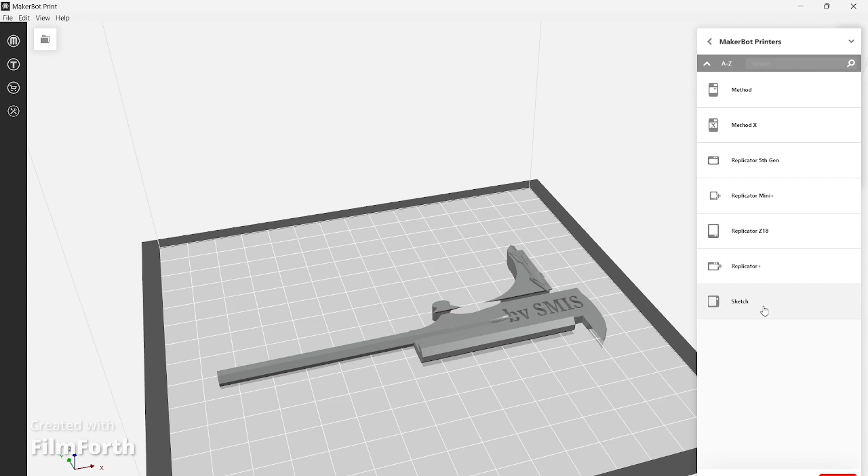The only thing that does connect was the MakerBot Mini and the MakerBot. There were two of them - MakerBot Replicator Mini Plus, and then the Replicator Plus itself. These two did connect. I'm gonna try this next time, hopefully. But the only thing that didn't connect was the sketch.

That's the reason why I tried connecting with the IP address and then add a printer itself. It wouldn't allow me to do that. I'm not sure what's going on with that. You guys need to check that out to see why it's not letting me connect the printer from here to the other side.

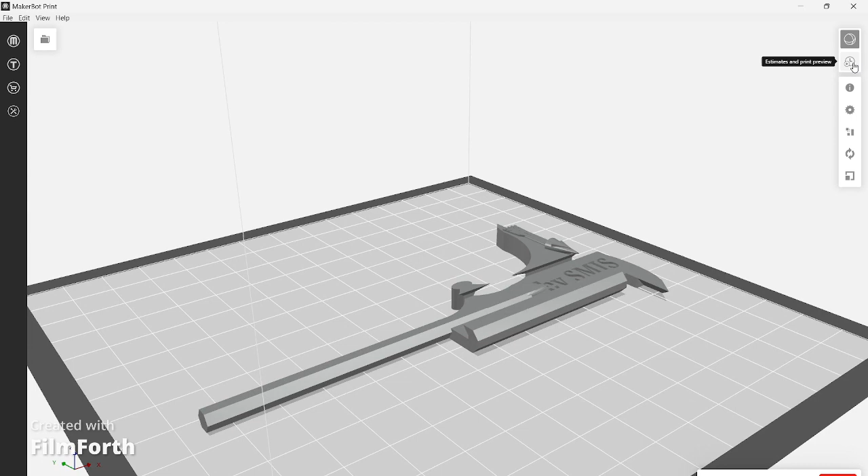So now, this one, I do like this right here, this software. This slicer is supposed to run itself. For example, this right here is the cloud, that's being tested right now.

I like it, I just hate it. That's the reason why I don't. Because look at this, look at this.

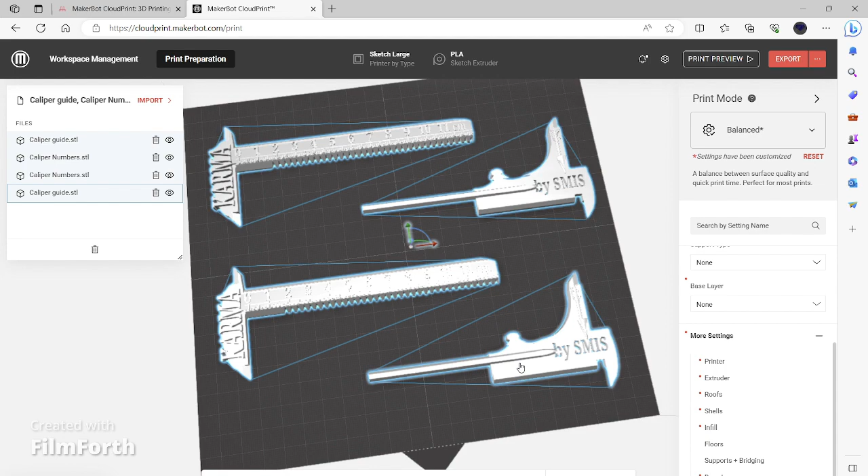These ones are the tool path. I really hate that because I thought I could actually rearrange this guy, move him inside, so I can have this one print in a closer environment. Instead, it gives me this ridiculous detection of interference. Why does it have an interference detection?

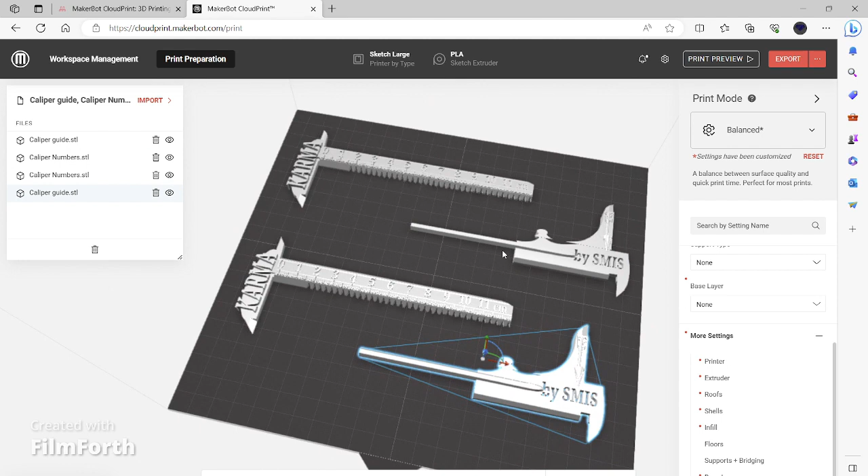Because the nozzle doesn't actually touch these guys right here. I don't understand that. So I have to move it out here where you just waste a lot of room and space, because I can actually bring this guy in here and now add another third one on there.

Because that way it'll be easier for me to print more items with it. So it'll become like this right here. Add more, let's see here. Bring it down so I can add two more on top, so I can 3D print three more. I have another printer that's an off-brand MakerBot - it printed three of them, and it did very well.

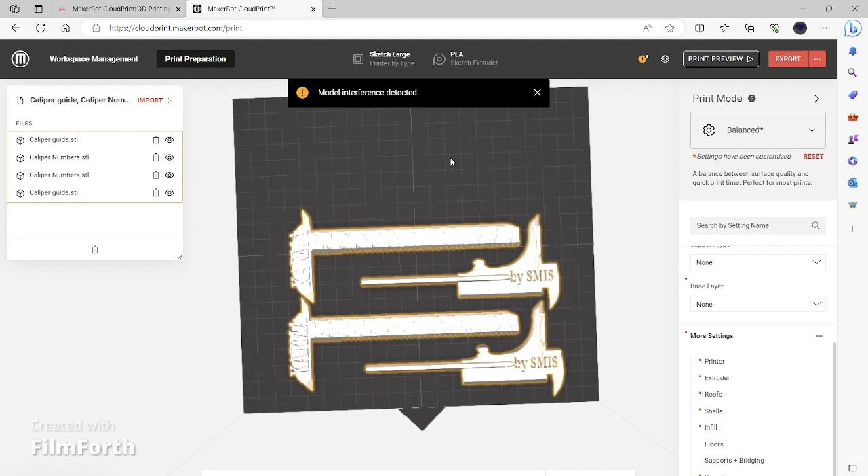I don't get why this has to be like this because of this ridiculous interference detection, unless there's one in the settings that I can actually remove without issues. I'll probably have to go mess around with it. Maybe it does have that. I have to look into that to see what's going on.

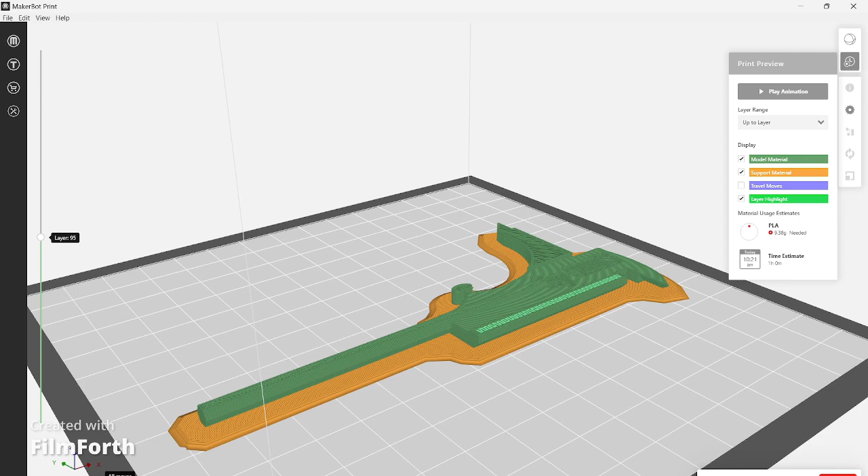Now, once I do print preview of this guy, I'm also gonna remove this guy, the raft - I don't need a raft. I just need the view of it. So I'm gonna print preview.

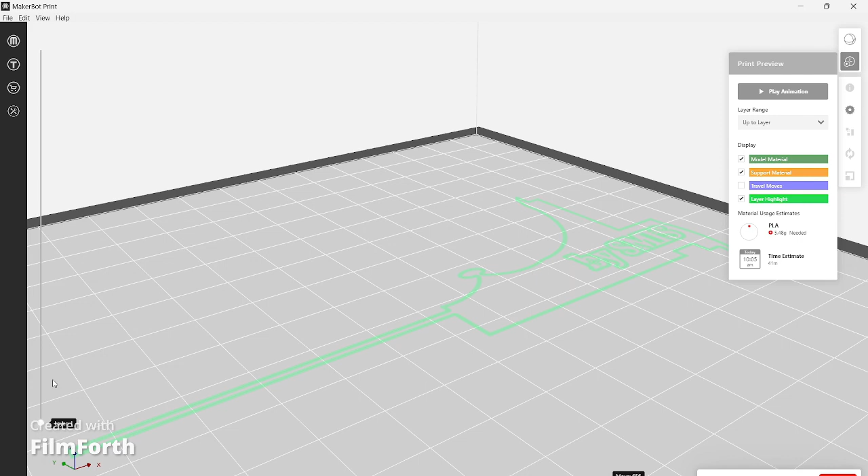I really love this one. This is where the tool path actually creates itself. So I'm gonna bring this guy down. This is the reason why I like this one, because it should follow its own path onto the green area, and that will just follow the exterior. That's it. And once I go to layer 2, then it begins to fill in the inside.

This one, however, does not do what it's supposed to do. It doesn't do this one. It just did layer 1, just these zigzags. That's it - there's no exterior lines, nothing else.

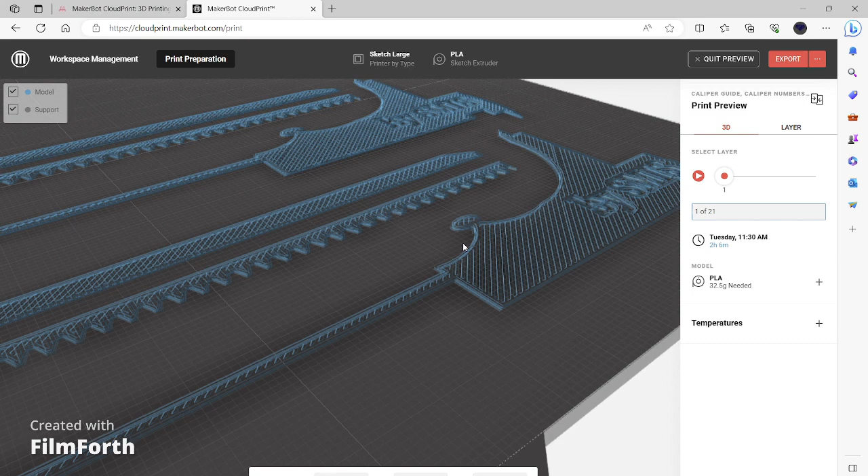It kept doing the interior first instead of the exterior. I don't understand that, why it wouldn't do that. Maybe I had to figure out the settings on this guy - maybe it wasn't reversed.

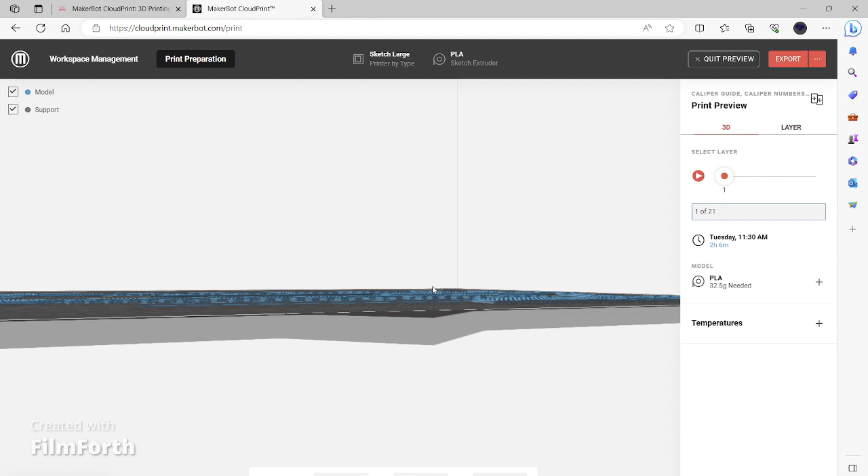Maybe I have to look into that one to see what's going on with it. With the nozzle height, it's supposed to print the height itself, but for some reason I'm having complaints that the nozzle or the filament is not sticking onto the bed. Right now I have masking tape and a glue stick on the print bed. Hopefully that does very well. I also had to readjust the Z height so it prints properly.

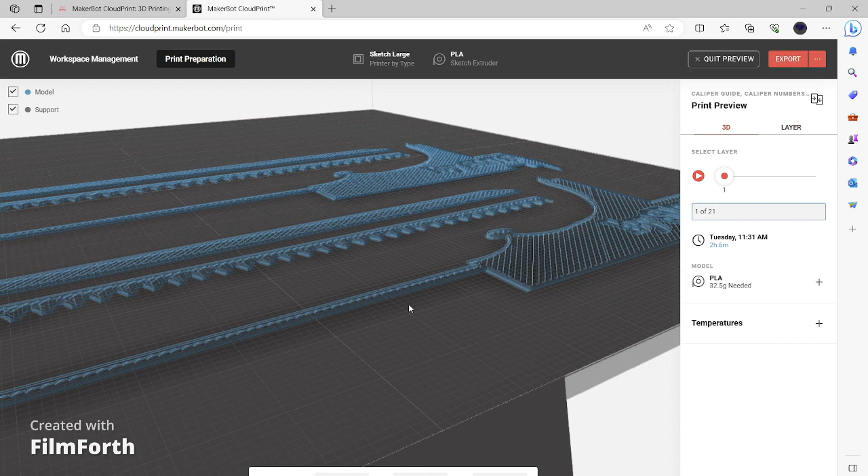I'm not sure what's going on with this right now. Excuse me, this thing is really ridiculous, because look at it, you can't do another model on this one. I'd have to break it outward. Maybe it's good for one model, yes, but if I want to do an array of items, it wouldn't allow me to do that.

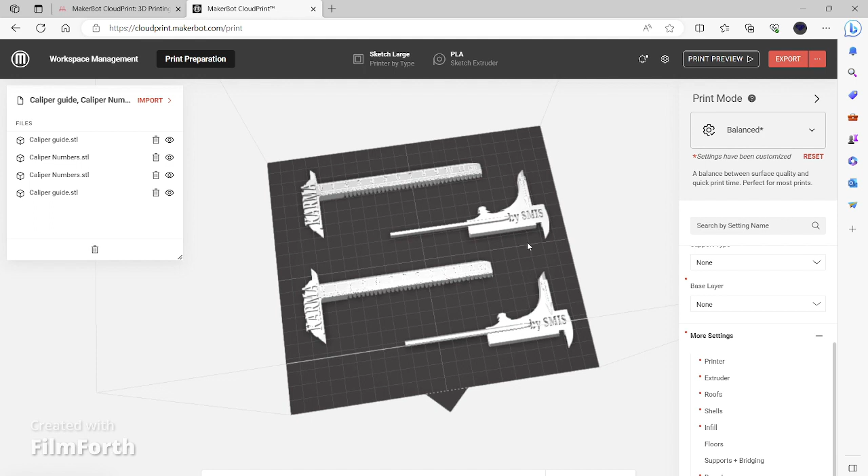Maybe I have to look into the settings, maybe adjust it to fix a few issues here and there. But I don't like this, including the raft itself. If I include the raft in the print preview, this is what it gives me, and it looks like a nightmare.

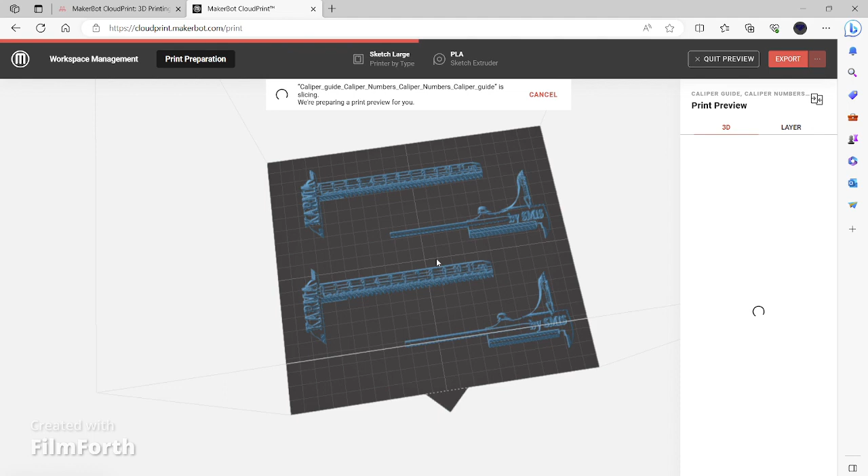We'll have to wait for it to load up first. 50 seconds. But yes, it's just like a nightmare, I don't like it. Also, it would not allow me to add in a brim, even though it says brim outset of 5, but when I try to look for add brim...

So this is the reason why this one really attaches to each other. I don't want to waste a whole material, I just want to have an individual raft. That's it, that's the reason why.

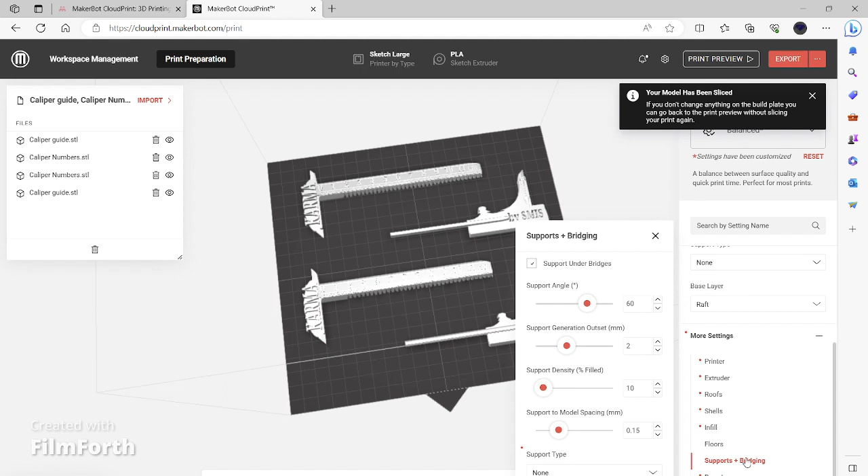And on top of this one right here, it doesn't include a brim, and I don't understand that. I don't know, I have to look into that to see what's going on with it. It does say brim, but it wouldn't actually give me the exact material, so I'm not sure what's going on with it.

Maybe I have to go back to the settings to see what's going on with it. But again, I tried fixing it yesterday, and it was very, very frustrating. So I'm not sure, but yeah.

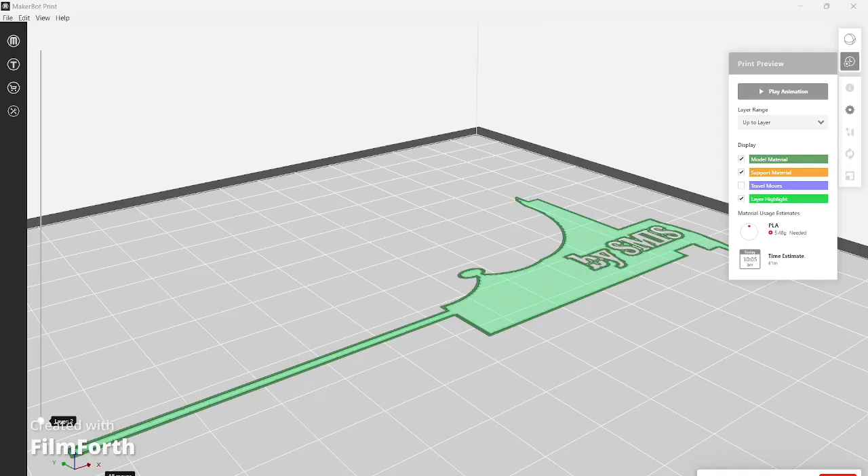But I like this one, the original one. Hopefully they fix this and include the sketch large on here, and hopefully they'll fix the issue trying to connect this printer. I really like this one because, as you saw with the sketch in the previous video or clip, it really turned out fantastic.

I love that. Even though it's slow, I love it. It actually does very fine details, it really does very well. It prints fantastic, I love that, and including the tool path, it did very well.

Except for the large one, I'm not sure what's going on with it. It kept going from the outside rather than the inside. So I'm going to show you that on the video to see what's going on with it, or show you what really happened, and once you see that, you'll know what I'm talking about.

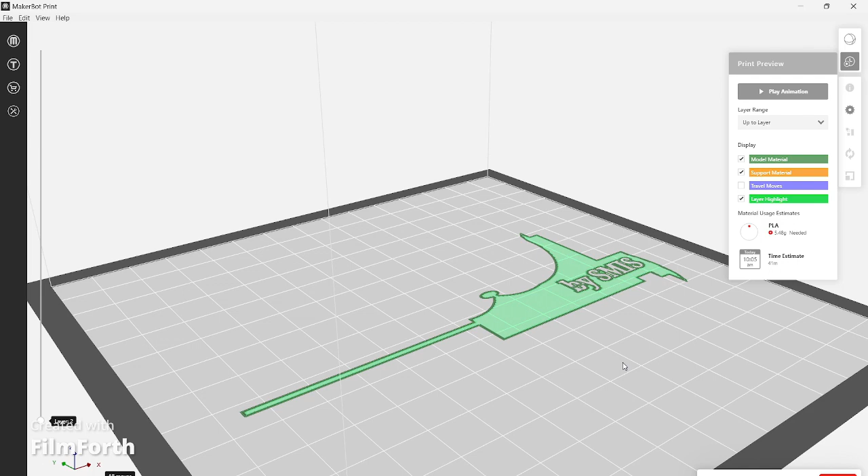And I think that's what customers are telling me, that it wouldn't actually stick onto the bed. On top of that, it was very, very slow. I did slow it down. Printing speed is supposed to be 55, and it would never slow down.

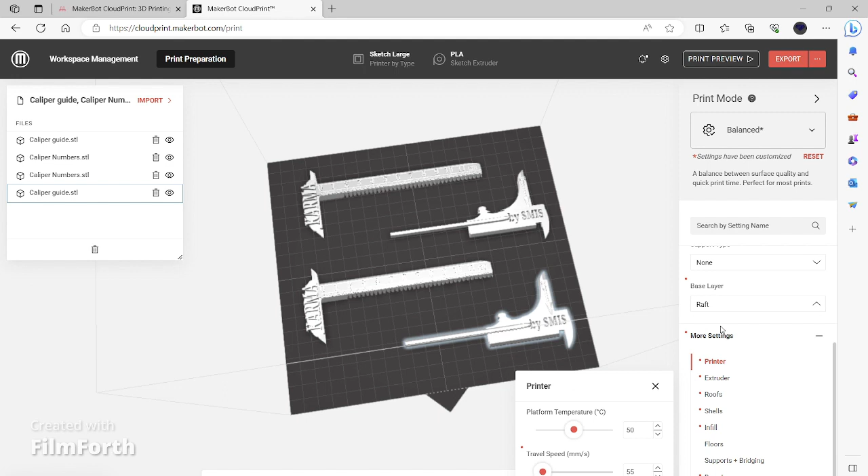So I'm going to change the settings to the lowest ones if I can, and hopefully it will do what it's supposed to do. If not, I don't know, I'll have to mess around with it. I have no choice but to put the raft on there just in case, because I really don't want to add in those extra materials. I'll probably look around the settings to see where I can fix this area and go from there. So that's one of my big issues right now with the sketch large.

I already set it up on Cloudprint. You just go to workspace management, go to workspace printers, add printer, go to Sketch. Then go to your printer itself, go to settings, Wi-Fi or connections, and choose authorization, which is right beside Wi-Fi and internet cable. Click that, and there are two options: authorization code, or authorization with the profile. Make sure you click authorized with code. Once you click that, the printer will give you a code, and you input that code here.

So that's great, it's not that bad. It was easy to connect.

Yesterday I had issues with the Wi-Fi and USB connection, using USB. It didn't work on USB, I'm not sure why. I downloaded the profile, I should have followed the directions. It would never do that. I'm not sure why, or maybe it was taking a long time. I should have left it in there with the USB drive. Maybe you guys have to try on your side too.

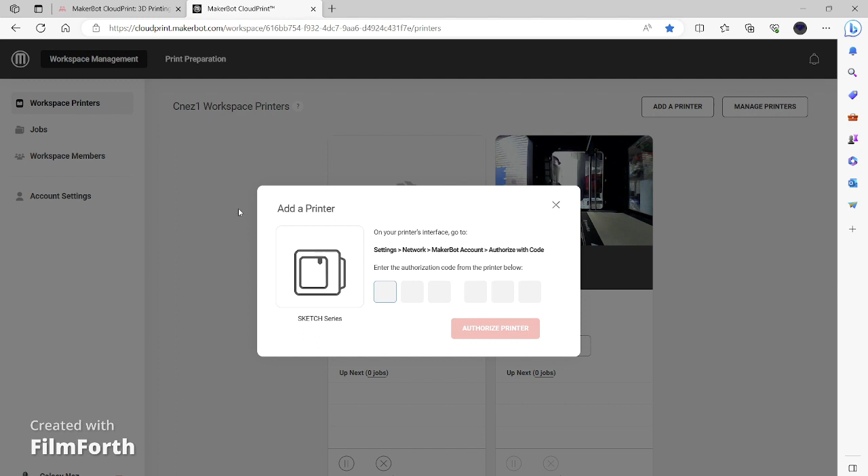It worked fine, it's just that the touch screen was too sensitive where you input the password, so be careful. Do it as quickly as possible and put the information in. Hopefully you get the password correct, because it will definitely slip and accidentally press the other keys. But it came out okay in the end, look at it on the screen. You can see the masking tape with the other items too.

Now what you can do is print preparation, I'm going to export it. Click this little icon with the three dots, and it should show the name of the printer, which I named MakerBot Sketch Large 1. Click that, and it should render through this on here, so the entire print job should show up too.

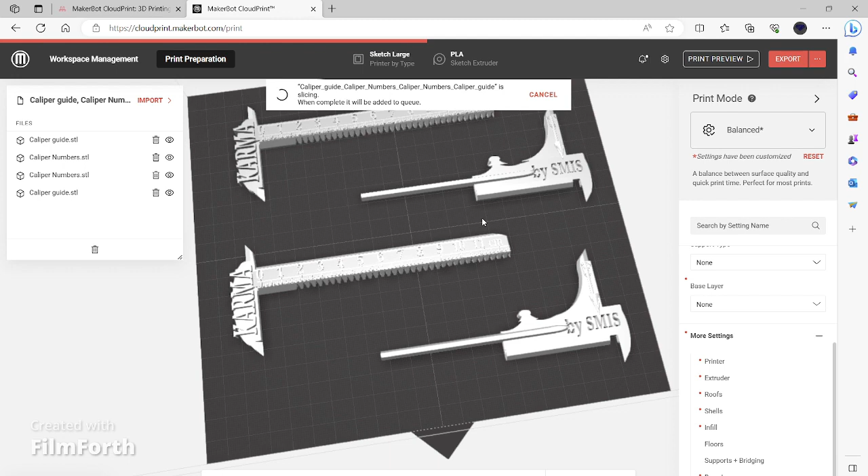So I'm going to print that right away. Go to workspace management, and it should say idle, then start print. I'm not going to start it right now though, because I have to look into the settings to see what's going on with the entire area. I'll show you guys the next part afterwards.